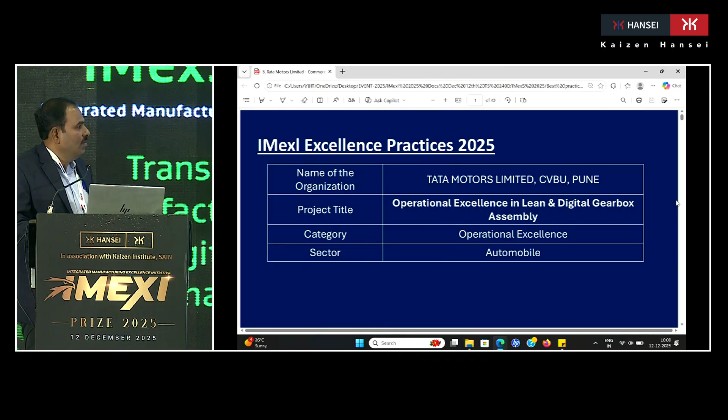Sponsor is our plant head, sir. Our mentor is Prasad Pulke, our factory head, and myself, the presenter.

Tata Motors manufacturing has two units: passenger vehicles and commercial vehicles. We are in the commercial vehicle business unit, where at Pune plant we manufacture 4-ton to 19-ton vehicles. These are the variants we manufacture at Pune plant.

I am from the gearbox assembly line. We manufacture gearboxes for various commercial vehicles, including the G400 and G550 gearbox assemblies. The project covers 80% of volume, depending upon these.

The existing manufacturing process was manual gearbox assembly before the start of the project. This is one of the critical processes demanding precision and consistency, and conventional operation relied heavily on manual data entry and human judgment.

Challenges include manual data entry taking time to record on manual history cards, lack of centralized data for analysis, and high dependency on human intervention.

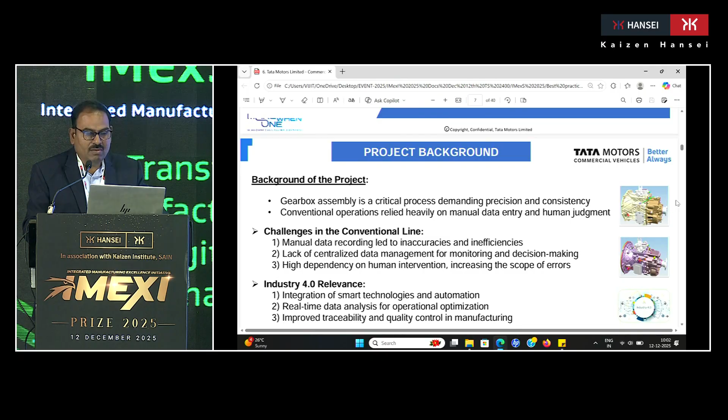The industry relevance lies in the integration of smart technology and automation, real-time data analysis for operational optimization, and improved traceability and quality control in manufacturing.

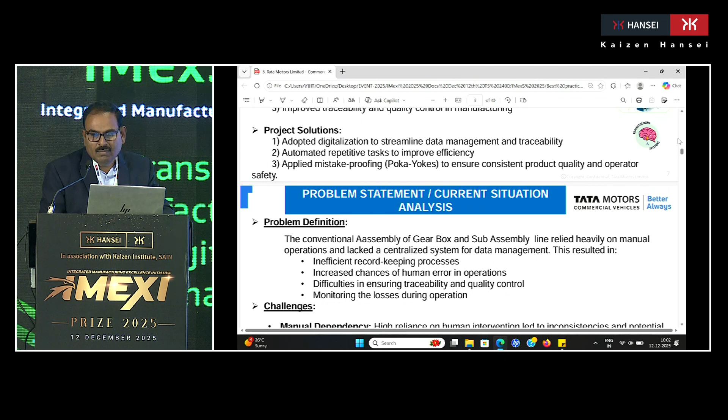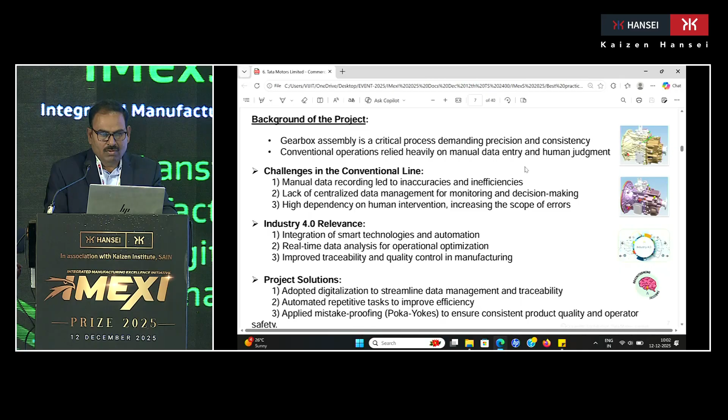The problem is that the conventional gearbox assembly and sub-assembly line relied heavily on manual operations and lacked a centralized system for data management, resulting in inefficient record-keeping, increased chances of human error, difficulties in ensuring traceability and quality control, and monitoring losses during operations.

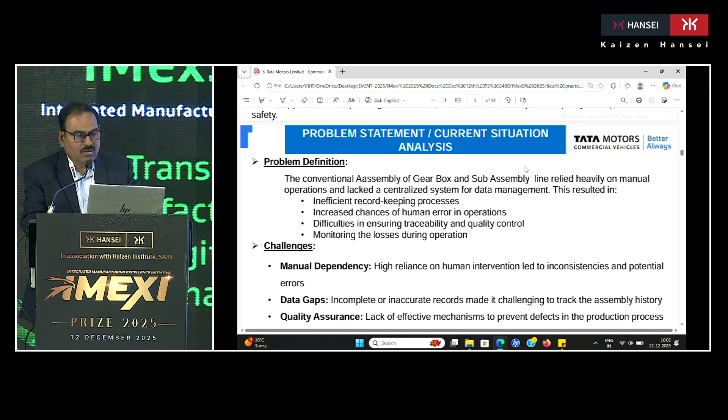Major challenges are manual dependency, data gaps due to incomplete and inaccurate data, and quality assurance issues—lack of an effective mechanism to prevent defects in the production processes.

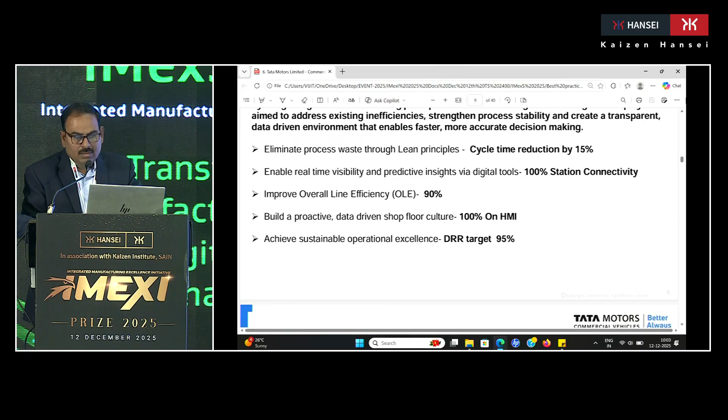The primary objective of this project is to transform the gearbox assembly process by integrating lean manufacturing principles with advanced digital technology. The project aims to address existing inefficiencies, strengthen process stability, and create a transparent, data-driven environment that enables faster and more accurate decision making.

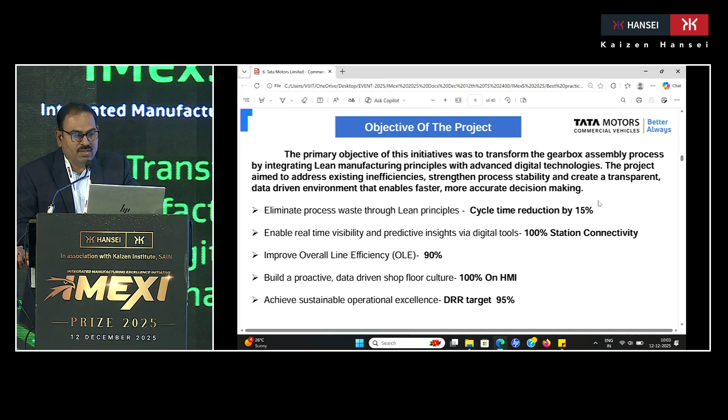We set KPIs at the start of the project: cycle time reduction by 15%, station connectivity 100%, OLE target 90% from existing 74%, building a proactive, data-driven shop floor with 100% HMI since operators are semi-skilled, and achieving sustainable operational excellence with direct run rate, DRR, at 95%.

At the corporate level, this is a lean digital journey across 6 KTs. KT stands for key themes, plus two key enablers. This entire project is connected across these 6 key themes and 2 enablers.

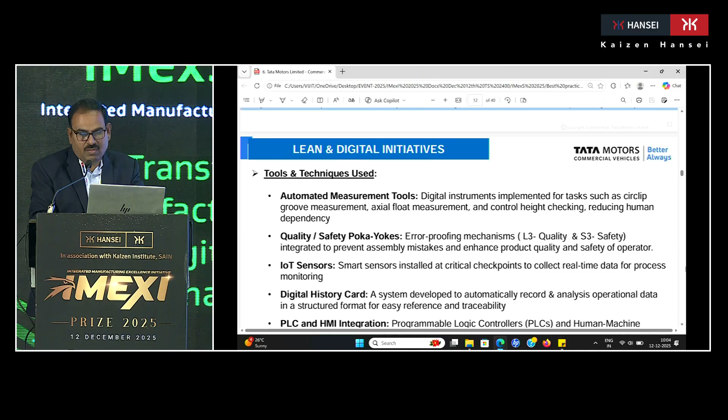The tools used are automated measurement tools, that is smart tools; quality and safety poka-yokes, which we call L3 control, the highest level of control on the shop floor for quality, and S3 for safety, the highest level of safety control; IoT sensors and digital history cards instead of manual ones; PLC and HMI integration as a major tool; and data analysis dashboards.

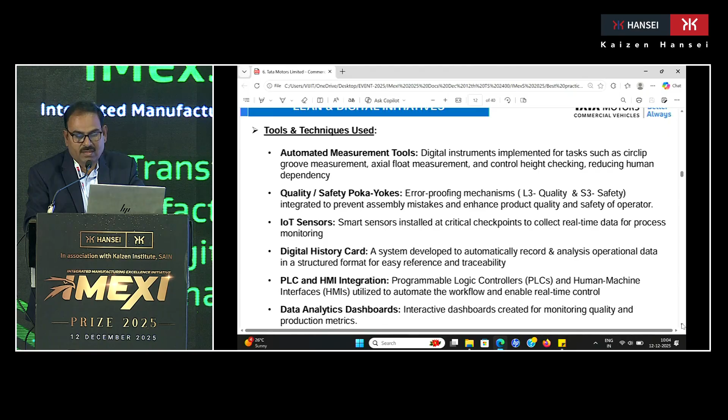This is the architecture for RFID tag implementation. Suppose this is one of the lines. In gearbox assembly, there are three main parts: main shaft assembly, counter shaft, and rear half and front half. These three sub-assemblies come together to start the assembly.

We started the actions from the sub-assemblies. This is one sub-assembly; the architecture shows station one, where the pallet has an RFID tag and an RFID reader. The data measured at that station goes to the RFID reader, then to the SBC board, and then to the PLC, moving from one station to the next.

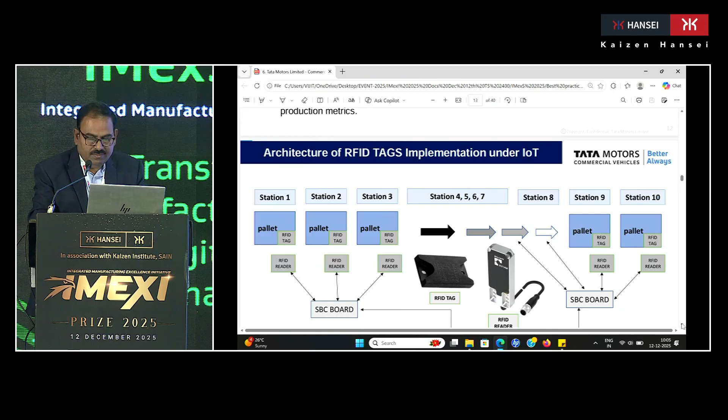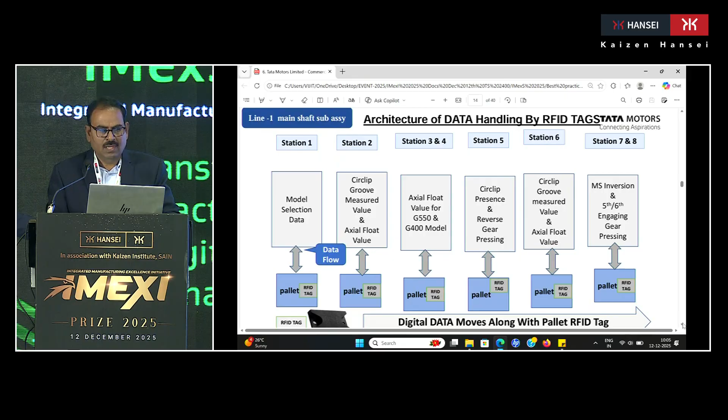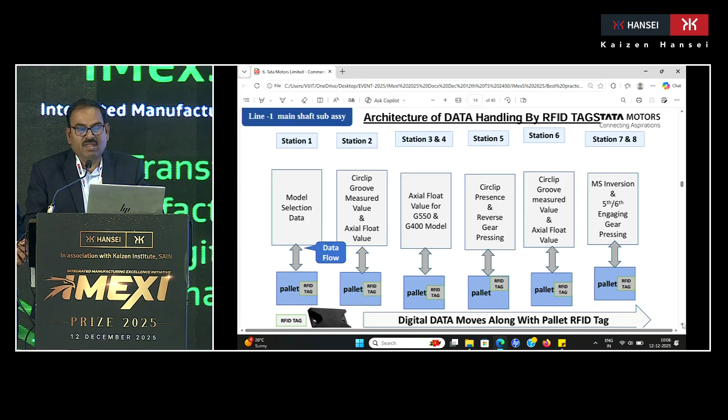Same way, this is one of the lines where the data moves from station 1 to the end of the line. Starting from station one, the data includes model selection, then quality parameters at each station—for example, groove, circlip groove measurement value, and axial float value. These readings go through the pallet RFID tag to the RFID reader, moving station by station, and at the end of the line are collected on the digital history card.

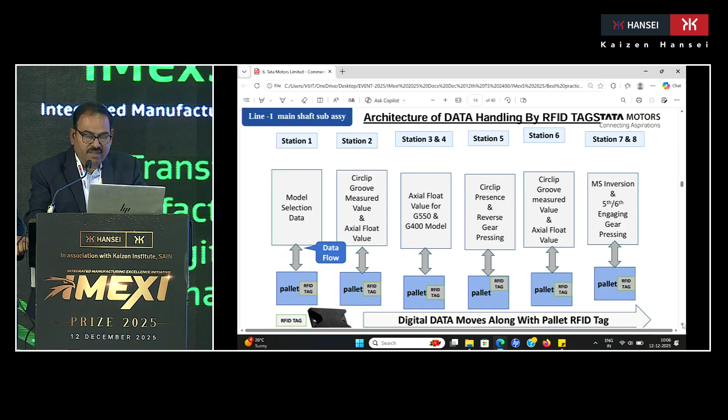This is the second line where actual readings and actual photos are shown. This is the rear half assembly, after completion of the first line, second line, and third line.

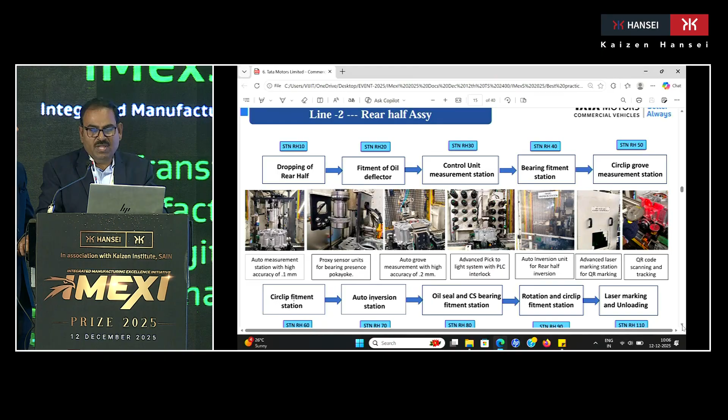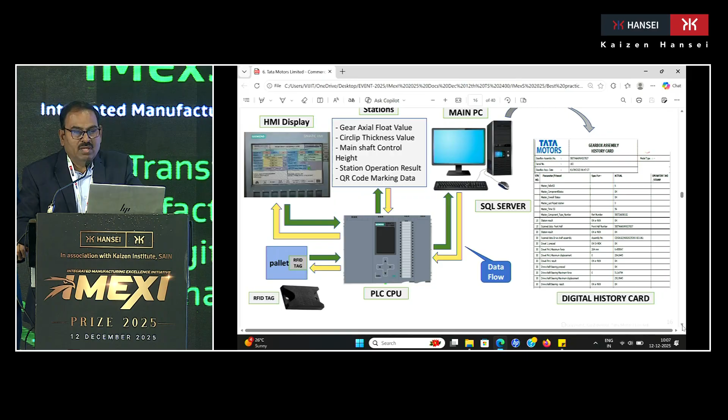The entire data flows from the pallet RFID tag to the PLC, then to the main PC. In between the stations, whatever parameters exist are connected to this RFID system, and also from the pallet to PLC to HMI connections for operator intervention and compliance indications. It then goes to the SQL server and generates the digital history card on the PC.

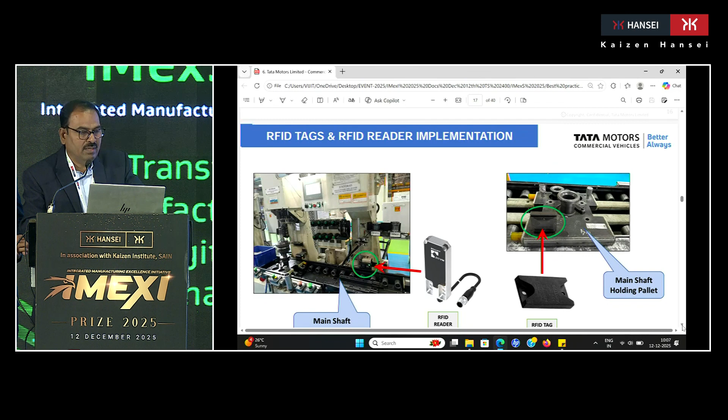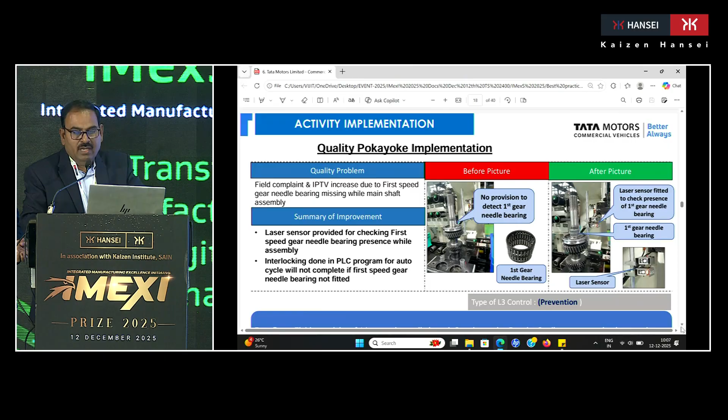This is what we have done on the lines. These are the tags, these are the pallets. This is one example: in the main shaft assembly, there's a chance the operator misses putting in the bearing before entering the gear, particularly the needle bearing. We have provided laser sensors ensuring that the pallet and the station are interlocked.

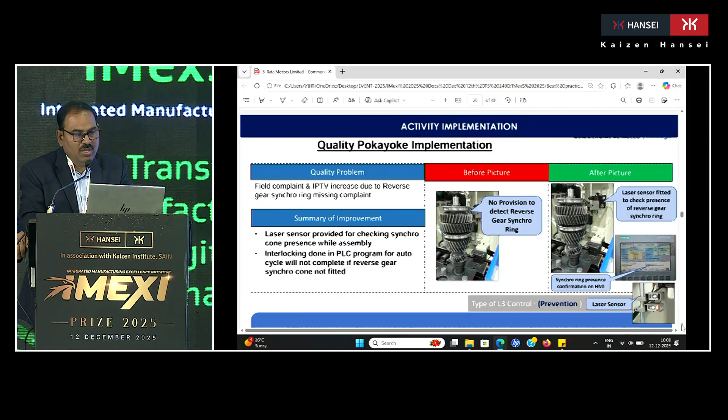This is a video in PDF form, so it's not running, but it shows how the cycle is interlocked and how the operator knows before authorization or before end of cycle. Similarly, for the gear synchro ring, a precision component with very little thickness, there's a chance of it being missed, so a laser sensor is fitted and interlocked with the cycle.

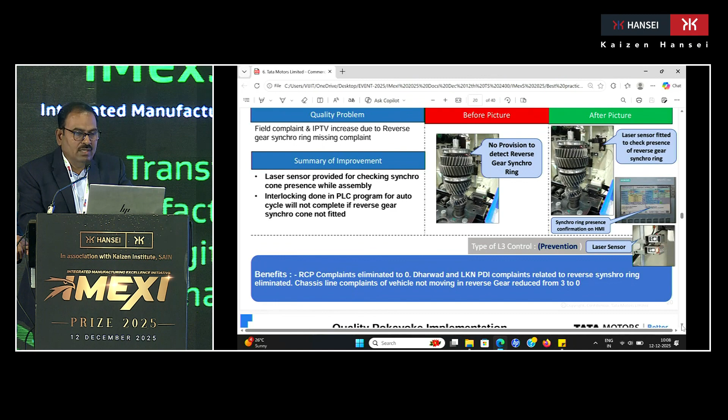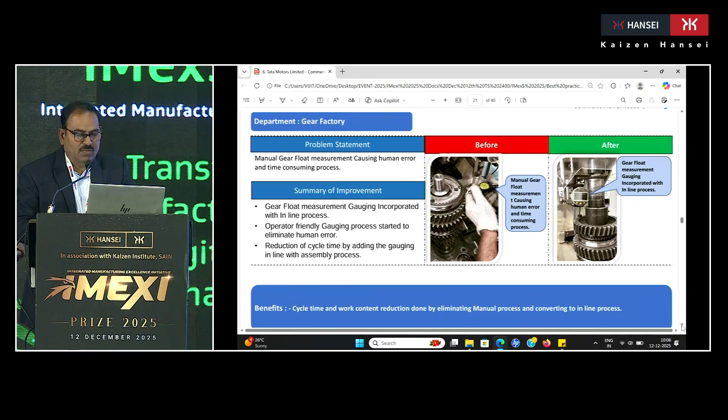This is an important parameter in the main shaft where the float is checked. Initially it was done manually; now direct contact type digital dials are used to check the float, ensuring whatever quality parameters are mentioned in the system are maintained.

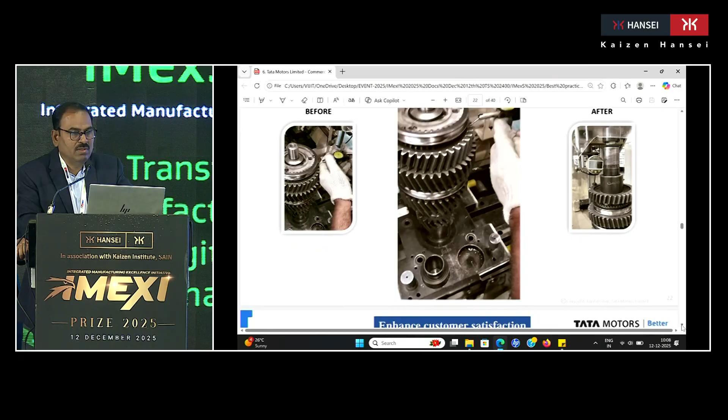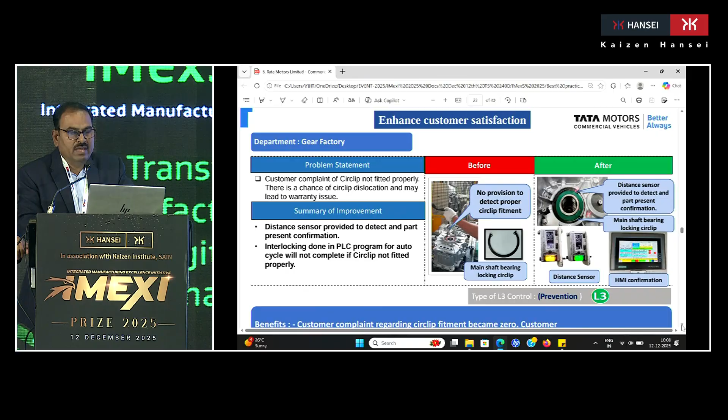This is also a video which isn't running since it's a PDF. Similarly, in the rear half, there's the circlip. If the circlip is missed, there's a chance of the entire gearbox disengaging, so this circlip is also an important part.

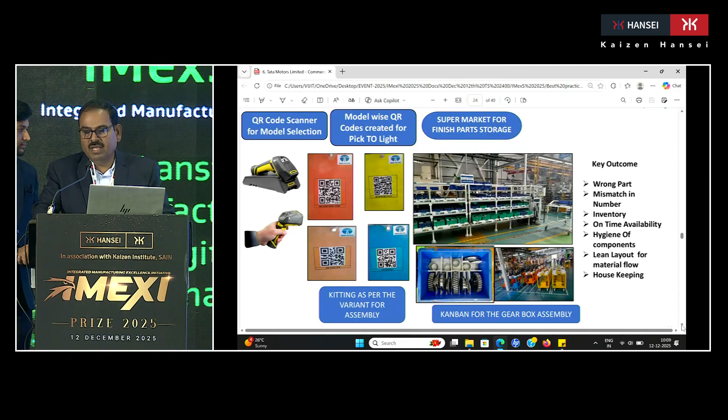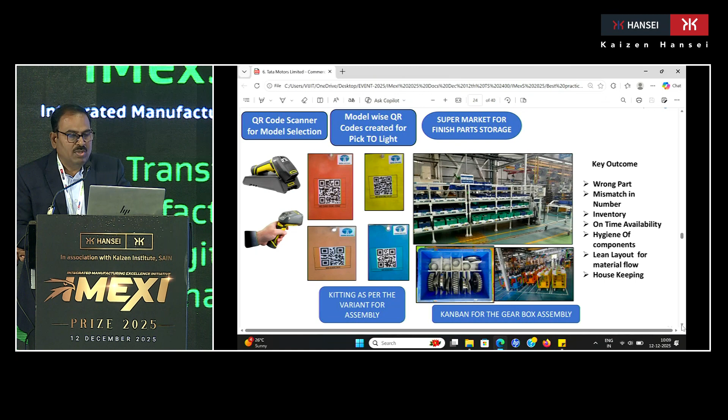During this assembly, we also take care of the pick-to-light system and kitting for each line. For model selection, we have provided QR codes since totally semi-skilled operators are working here. Key outcomes include avoiding wrong parts, mismatched numbers, ensuring inventory and on-time availability, hygiene of components, lean layout for material flow, and housekeeping maintained through this activity.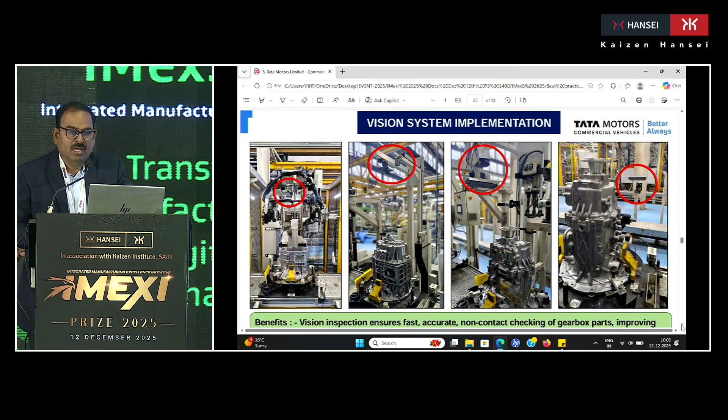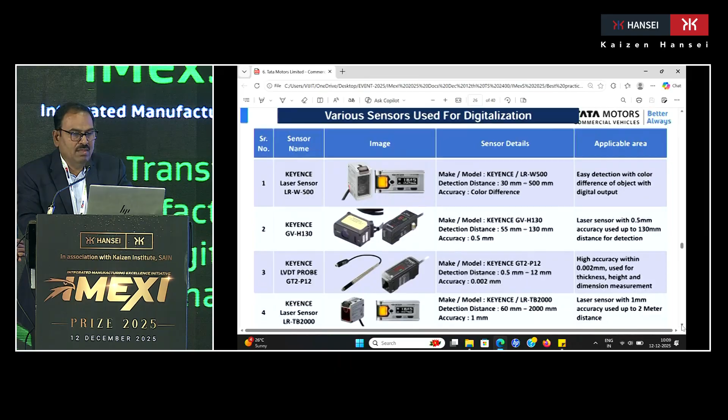These are some vision systems implemented on the gearbox assembly itself, since after three sub-assemblies it goes to the main assembly, where there's a chance of missing parts. So we provided these vision systems on the line. These are the various sensors used for digitalization, examples of what we used on the line.

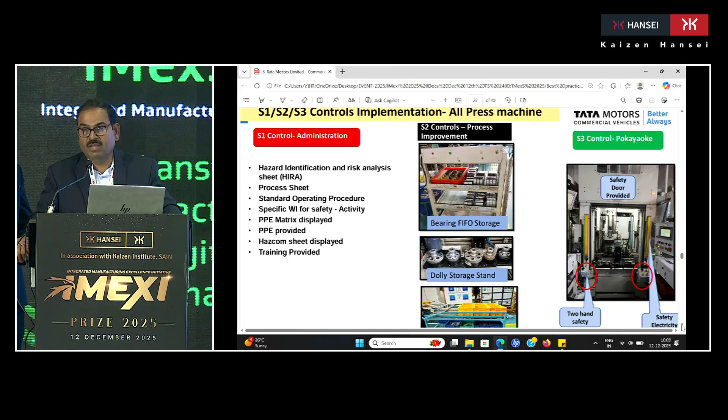Though the line is now operated by semi-skilled and female employees, we are also taking care along with quality, of safety as well.

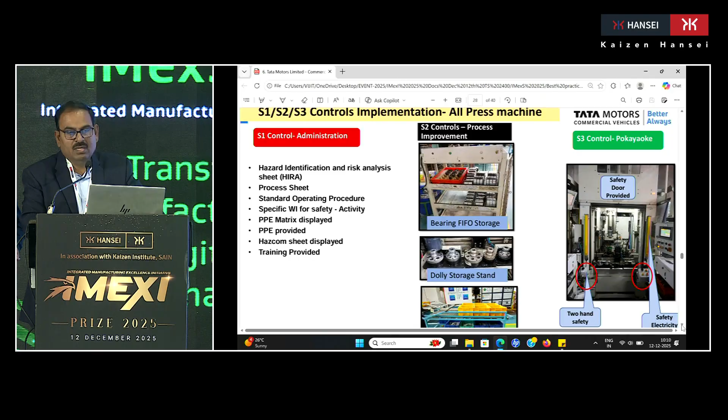As I talked about, S3 control is the highest level of control in the system. During that, we ensure two-hand safety curtains and doors, so there's no chance of mishap happening on the lines. That is also taken care of during this digitalization.

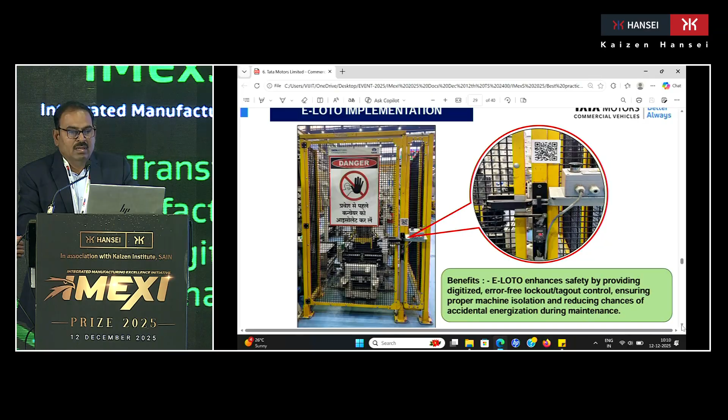Also the new concept of digitalization E-LOTO is provided, where only an authorized person can scan and enter the conveyor area for maintenance activity.

As I initially talked about, the main shaft assembly, then counter shaft and rear half - whatever data is there comes through the QR code on the assemblies. Once the QR code, as per the model, is scanned, the entire data from the main shaft assembly line goes to the conveyor. Similarly, counter shaft and rear half data also comes to the assembly line along with the gearbox.

So the entire number of stations, S3 controls and L3 controls, and all the quality related data comes to the direct main gearbox PC, and then it goes to the quality parameter analysis system.

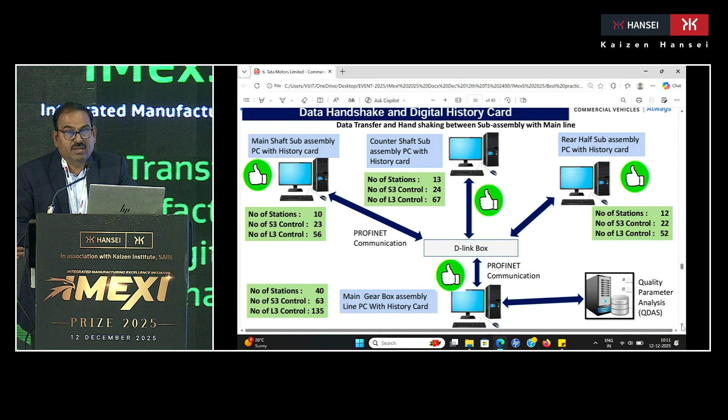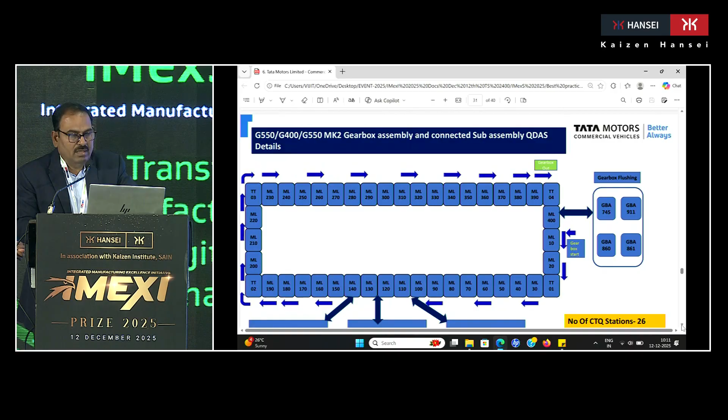After this, we have implemented the system where critical parameters are monitored and CTQ stations are identified. This is the gearbox assembly line - there are 40 stations. After data enters initially into the conveyor, the entire gearbox comes with the total data.

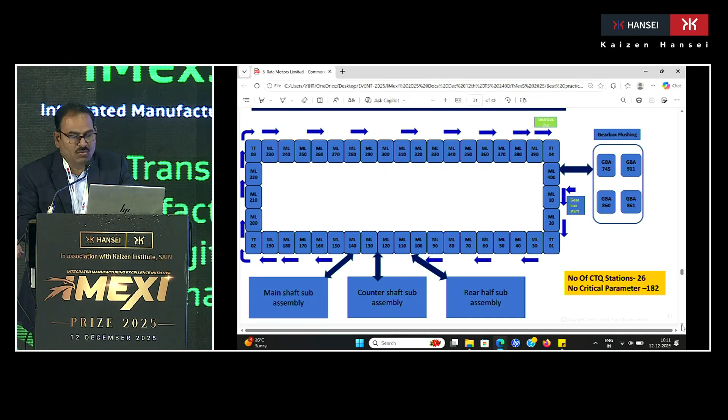For each station, the number of CTQ stations identified is 26, and the number of critical parameters is 182, which are monitored for the online monitoring system. We ensure that whatever parameters or processes are in stable conditions.

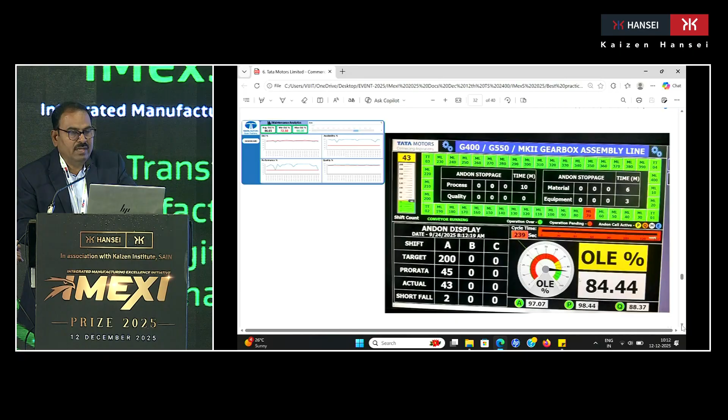We also tried OLE monitoring with all this data, and we provided andon on each station - PQME, that is process, quality, material and equipment. Whatever issues are there at the operator stations, there is an andon call, and accordingly the time starts calculating and is recorded. Once the entire shift completes, whatever andon losses there are automatically comes for the analysis part.

During the initial stage, we understood that some problems were there, and stoppages were observed because of unskilled or semi-skilled operators with less process knowledge. So we tried alarm generation for each process, to flag what components they are going to miss.

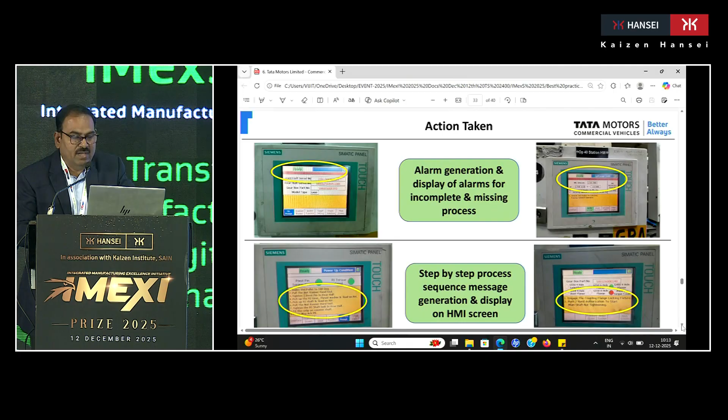Those alarms are generated on the HMI. Also, in the initial stages, we made a step-by-step sequence process to help understand the entire process of that station. This makes it easy to avoid minor stoppages on the conveyor.

We also introduced the digital JH3 check sheet. Each station has a JH3 sheet, which we had in the JH, and we incorporated it into the HMI itself. The operator starts the initial JH3 check sheet, completes it, and it interlocks with the first cycle, making it compulsory to complete the check sheet and ensure all parameters.

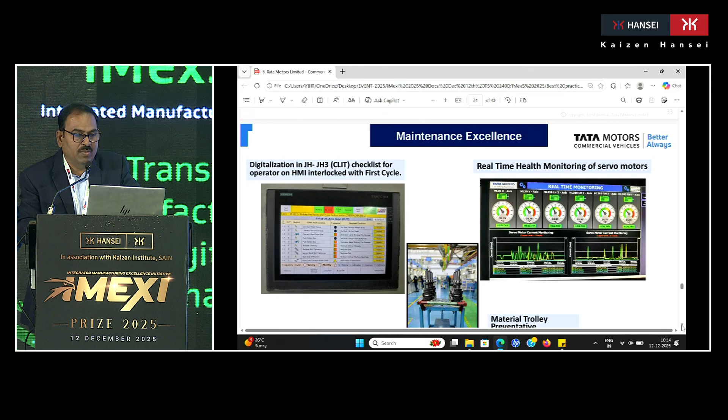We do real-time health monitoring of the servo motors and servo presses, monitoring current and temperature. For the trolleys used for transport, we use QR codes for PM monitoring.

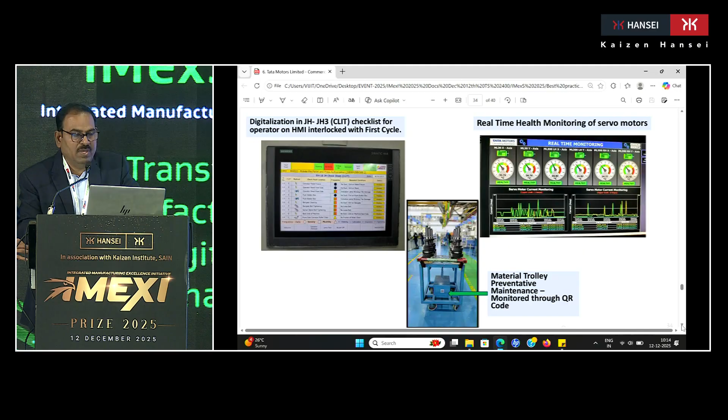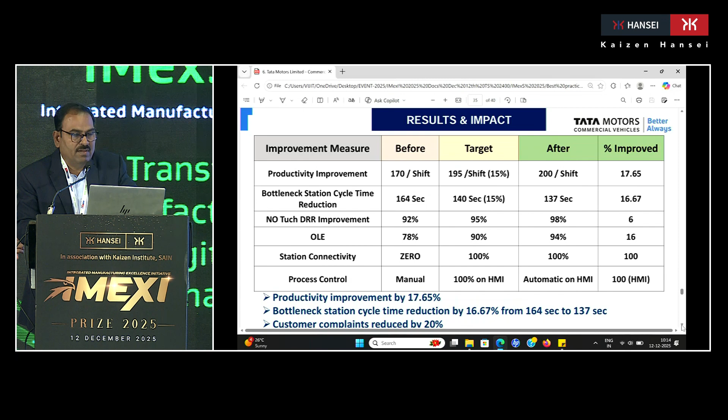The entire project resulted in production going from 170 per shift initially to 200. Bottleneck reduced from 164 seconds to 137. No-touch DRR improved from 92 to 98. OLE improved from 78 to 94, and station connectivity is at 100%.

Other benefits are S3 control, L3 control, and CPA, that is, customer product audit points are at zero. We've moved from skilled manpower to semi-skilled manpower, including women employees.

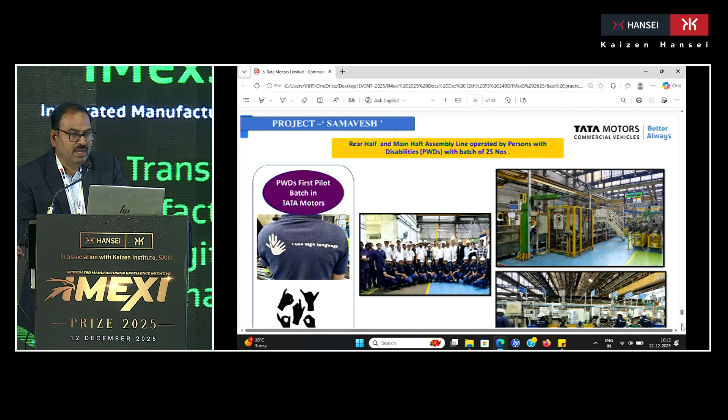I proudly say that Tata Motors is always leading in CSR activity. One CSR activity is inclusion, that is diversity of employees. The PWD employees are working in the shop floor.

The first batch of 25 team members were appointed on the stations because this digital system helps them work on the station without any quality lapses and safety lapses, since these PWDs are not hearing and not talking.

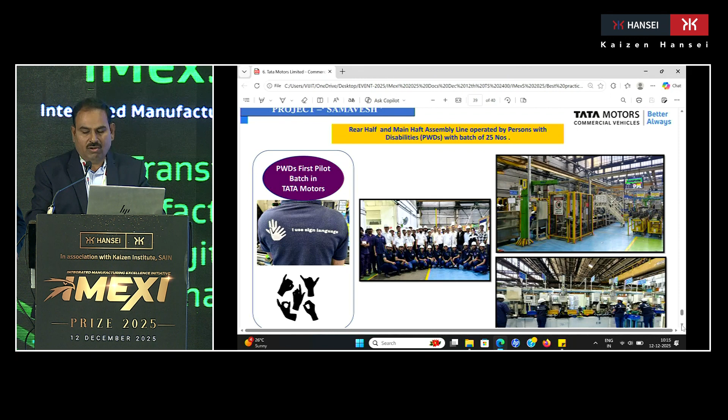Lastly, I remember late Shri Ratan Tata sir, and one of his famous quotes is: if you want to motivate yourself, you should always be eager to learn new things. That's it. Thank you very much.